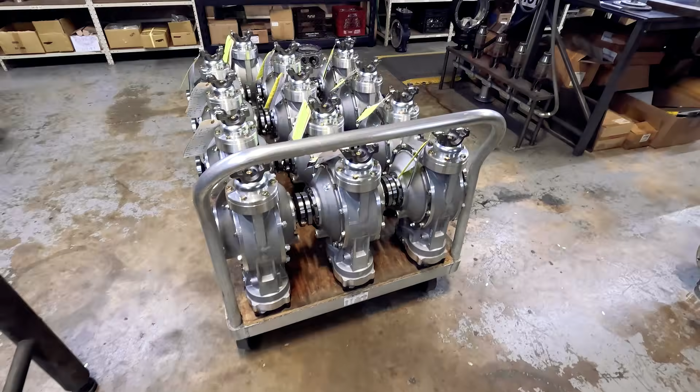For nearly 2 decades, our independent quick change diffs have dominated drift racing. Here's a detailed look at how they're built.

Our permanent mold A356 T6 aluminum center sections are cast in the U.S.A. and machined in-house here at Winters. We'll drop a link to a video explaining why permanent mold castings are inherently stronger than sand castings.

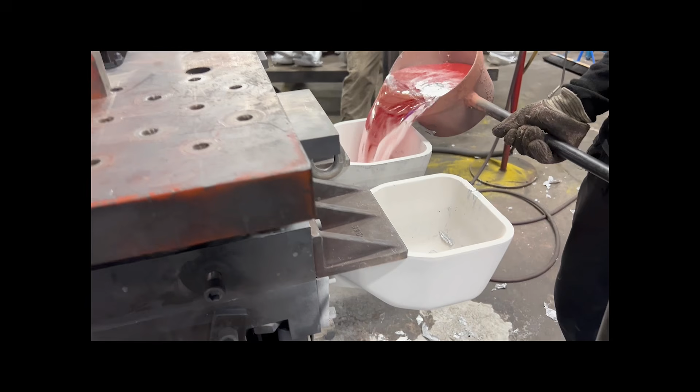This diff features our black thermal dispersant coating. The yoke bearing has already been installed and the center's been warming on our bore heater for 30 minutes to bring it to 450 degrees. If you're rebuilding a diff in your shop, you can also heat it in an oven.

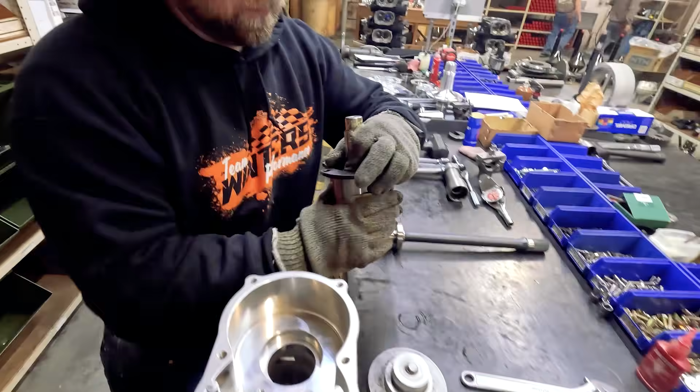At 450 degrees, the pinion assembly drops right in place. This assembly includes the bearings, bearing cup, posi nut, and washer. 3/8 16 pins help with alignment during installation.

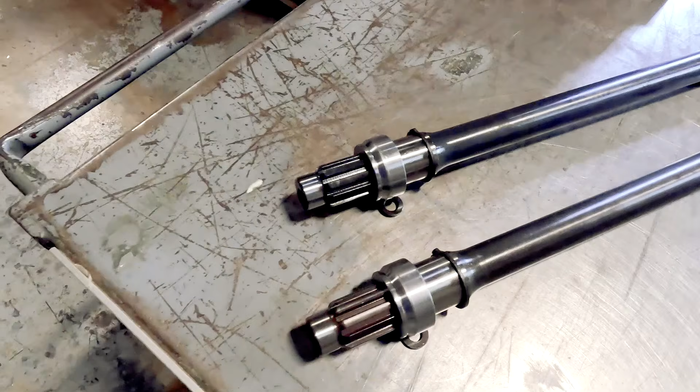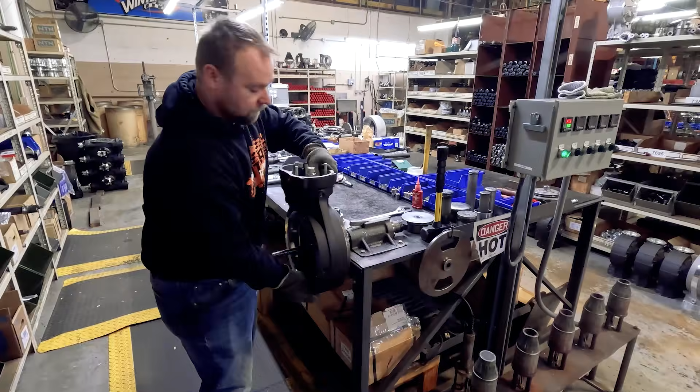Next, the lower shaft is fitted with its bearing and spacer and slid into place. Our lower shafts are made from either heat-treated steel or 350M, which has greater yield, tensile, and shear strength than the 300M shafts available from other manufacturers, due in part to the increased cobalt and titanium content of the 350M alloy. While the center cools, we'll show you how the output flanges are built.

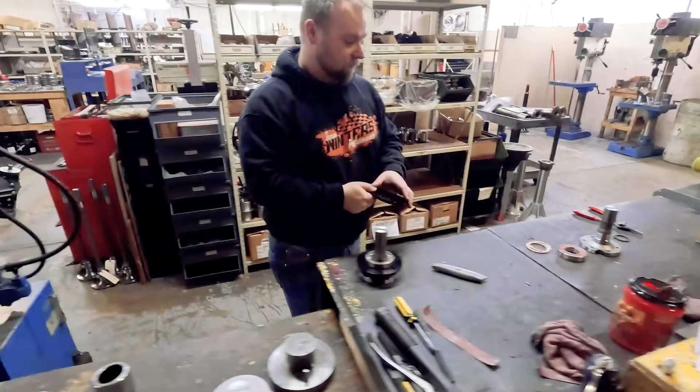Assembly begins by pressing the seal into the seal plate. Then we remove the bearing seals, oil the seal in the seal plate, and slide the plate and bearing over the flange before pressing them in place.

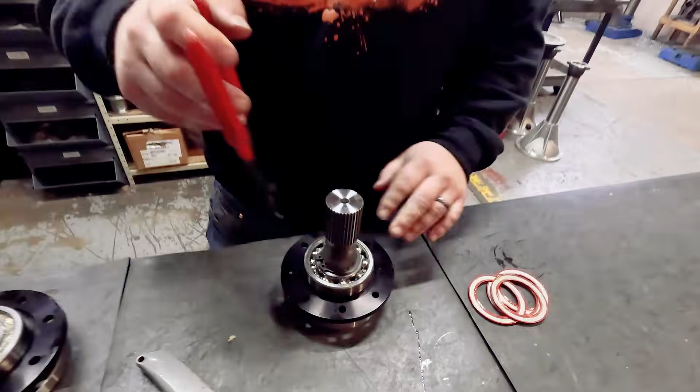Our 930 and 934 flanges start with 4340 steel forgings that are machined here at Winters. Both come in standard 35 spline, and 930s are also available in 31 spline for lower horsepower applications. After installing the snap ring, the flange is ready to roll.

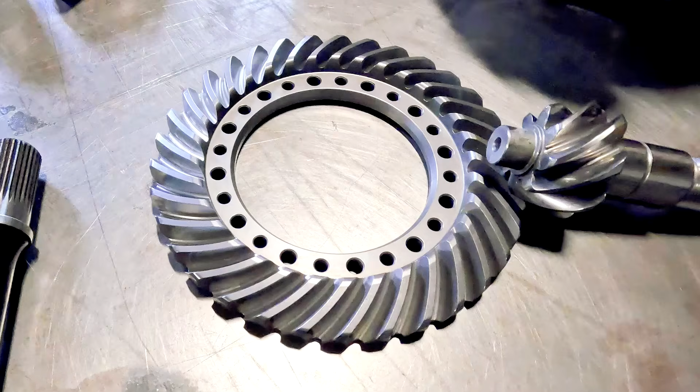2 more components only available from Winters are our heavy-duty spools and ground 9310 ring and pinions. The spools start as a 7075 aluminum forging that's machined and fitted with a splined steel insert secured by a pair of snap rings. That, coupled with the only available ground 9310 ring and pinion, makes for the strongest and most durable rotating assembly on the market.

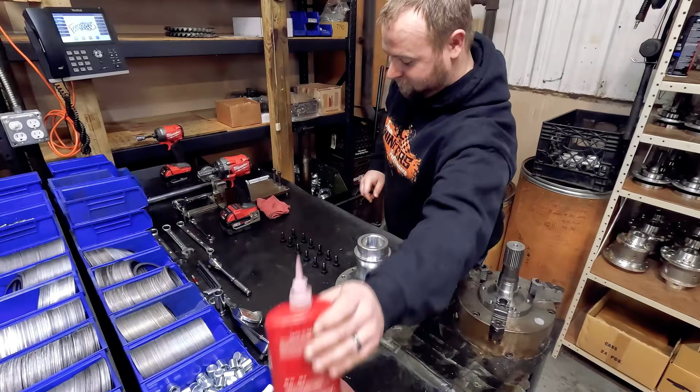The ring gear is secured with ARP bolts and flat washers with a bead of red Loctite, roughly the thickness of the ring gear mounting flange. After snugging each bolt, they're torqued to 60 foot-pounds, tightening in a crisscross pattern and then going back to double check each one.

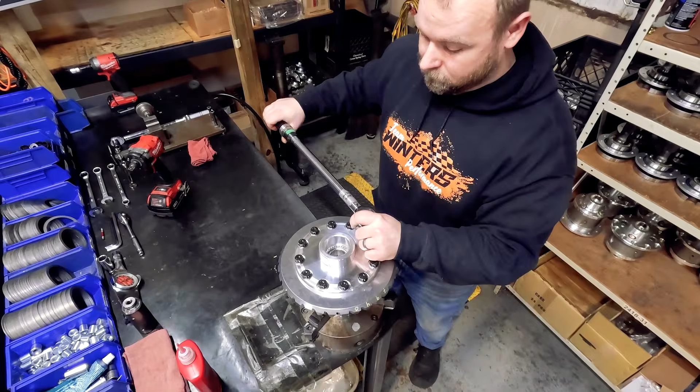Next, we install O-rings in the output flange seal plate grooves and apply a bead of petroleum jelly to prepare them for installation in the side bells.

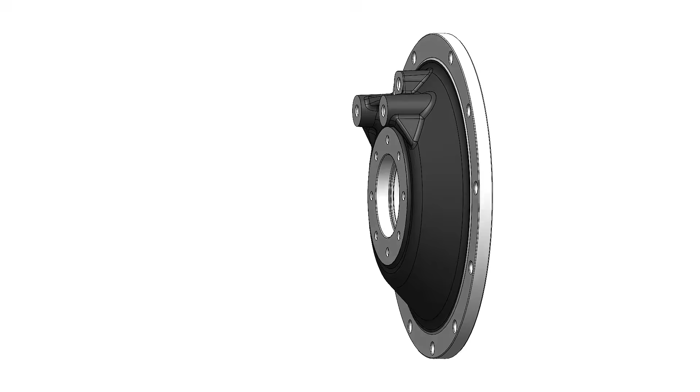An important feature of our side bells is that they're made from near-net shape 2014 T6 aluminum forgings. Near-net shape means that the raw forging is as close to the shape of the finished part as possible, and that only the critical mounting surfaces need to be machined.

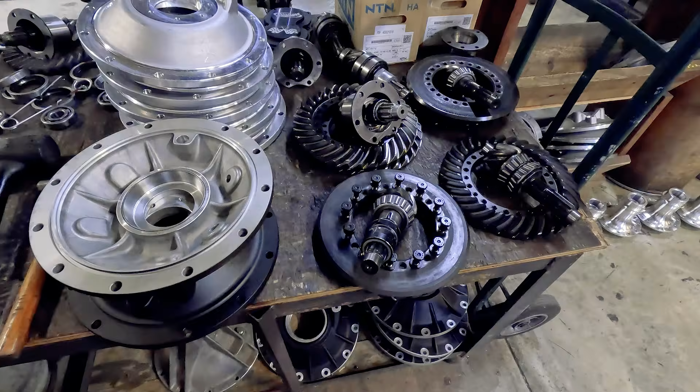When you machine an entire forging to create the shape of the part as other manufacturers do, you cut into the grain structure of the forging and expose the grain ends, which can lead to cracking and fatigue. We're the only ones who've taken the extra step to create near-net shape forgings, and in doing so we capitalize on the strength of the raw forging to create a stronger bell.

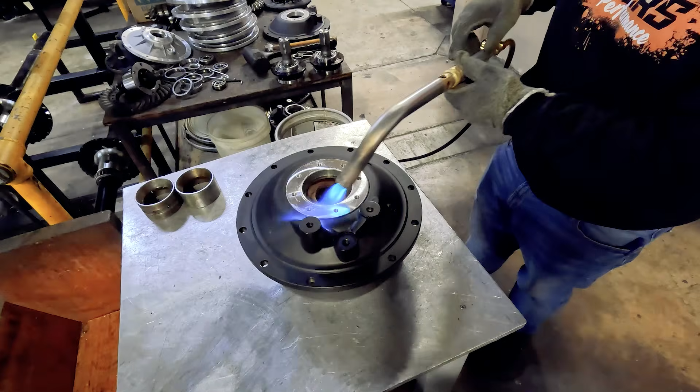To install the output flanges, we torch the bell for about 40 to 60 seconds using a propane torch with a rosebud tip. This can also be done with an oxyacetylene torch, but be careful not to overheat the bell since oxyacetylene burns much hotter than propane. Once the bell is warmed up, the flange drops in place.

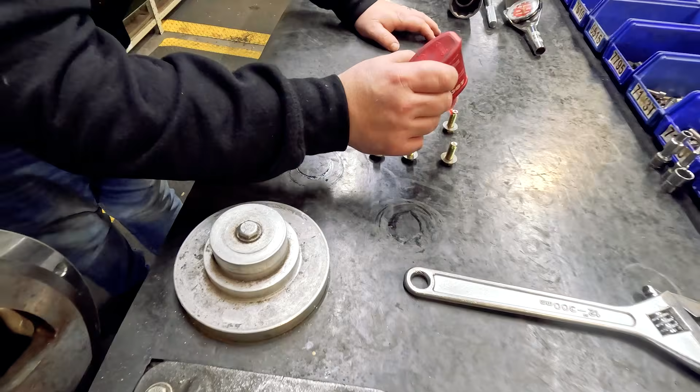When the center section returns to room temperature, we remove the pinion alignment pins and install the bearing retainer. Each 1-inch long 3/8 16 grade 8 bolt gets a bead of red Loctite before being run in and torqued to 25 foot-pounds.

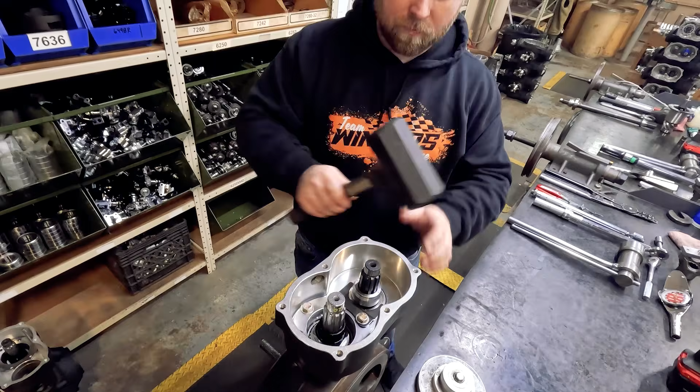Then we loosen the posi nut with a special 1 7/8 socket wrench and hit it with a dead blow hammer to make sure the nose bearing is seated properly. You'll know it's seated when there is a little bit of play in the pinion after you've hit it with the dead blow. Next, we use the same wrench to snug the posi nut while rotating the pinion.

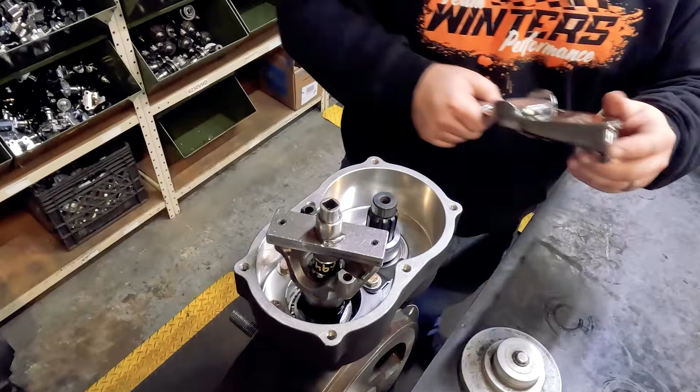Then tighten it to 15 inch-pounds of rotating torque. Petroleum jelly is applied to the posi cap before it's slid over the pinion and snapped into place.

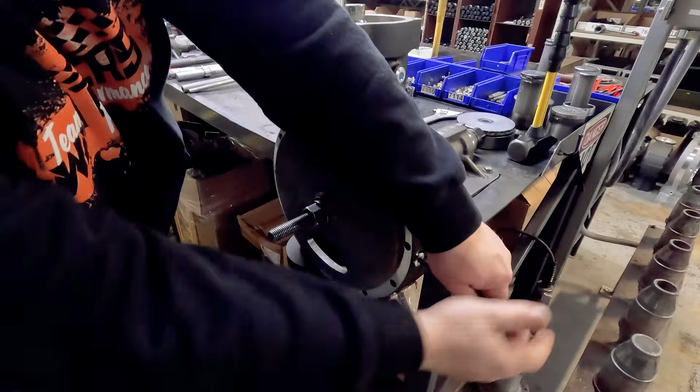Then we install the various plugs, including the drain plug, 2 vent plugs, and the fill plug at the quick change gear cavity. Next, we head over to an assembly bench and install a fixture for our assembly jig.

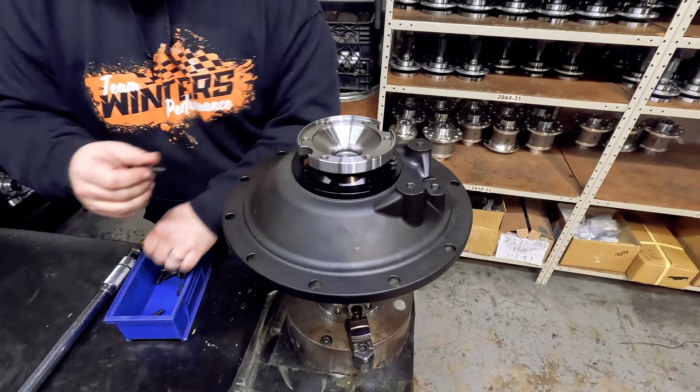By now the bells have cooled and the output flanges can be bolted in place. As we did with the ring gear bolts, the seal plate bolts are snugged and torqued in a crisscross pattern before going back to double check each one. The torque spec for these bolts is 17 foot-pounds.

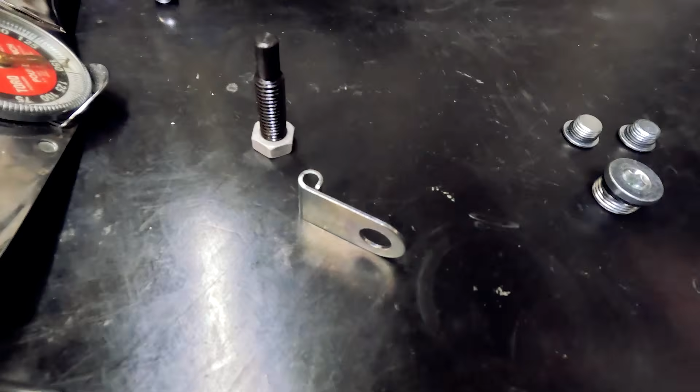In the left bell, we install the breather tube clip and an adjuster screw, which controls the amount of deflection of the ring gear. For now, it's just screwed in a couple of threads, but it will be set once the diff is completely assembled. Next, we temporarily install a breather plug, which is a -6AN O-ring fitting located adjacent to the brake mounting boss.

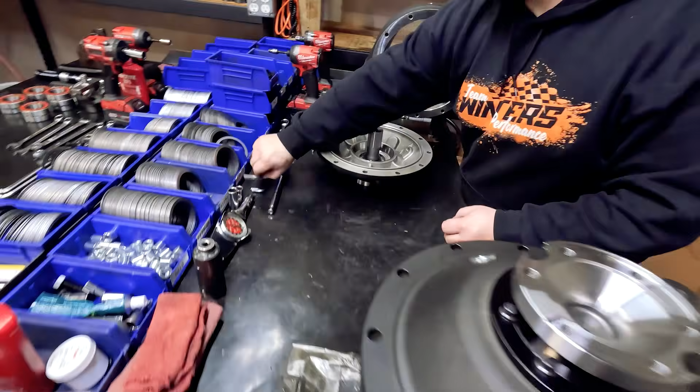Last is the oil fill plug at the top of the left side bell. Then on the right bell, we install an oil level plug located just below the axle line. O-rings are installed on both bells. On the left bell, we apply petroleum jelly to the bore where the adjuster screw is threaded in before installing the thrust block from the inside out.

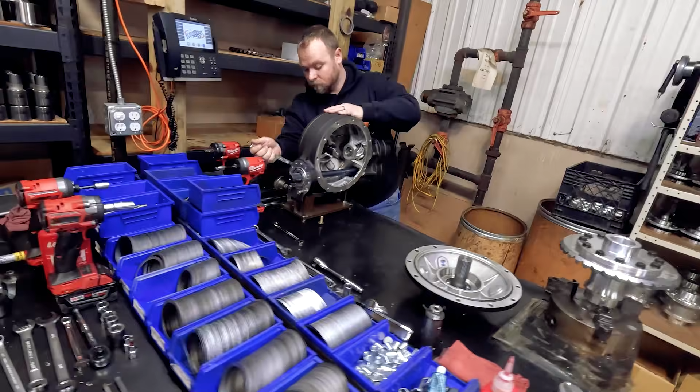The right bell is installed first, beginning with a 1 1/4 inch long 7/16 14 grade 8 bolt and flat washer installed at the 4 o'clock position and snugged in place. Then the 5 1/2 inch 7/16 20 thru-bolts and flat washers are installed.

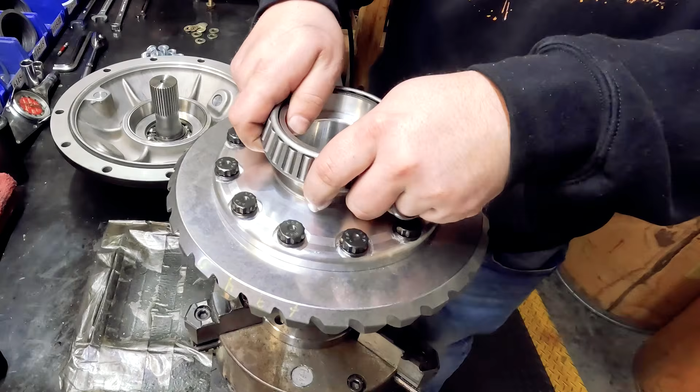To begin the spool installation, we install a series of shims before the tapered roller bearings are slip fit in place. On the left side, we start by shimming to 70 thousandths using 3 shims measuring 45, 15, and 10 thousandths thickness. On the right, we begin at 74 thousandths using 4 shims, 1 40, 2 12s, and 1 10 thousandths shim.

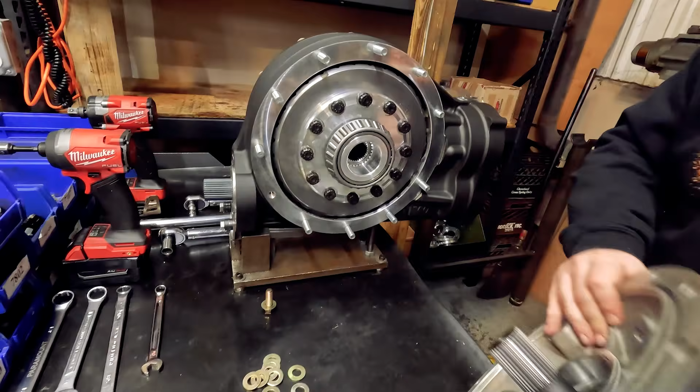The spool is then slid into the center section over the right output flange before the left bell and flange assembly is installed.

Once again, a 1 1/4 inch grade 8 bolt is installed first, but on this left bell it goes in the 8 o'clock position. Then we install a flat washer and lock nut on the thru-bolt at the 4 o'clock position and torque it to 35 foot-pounds.

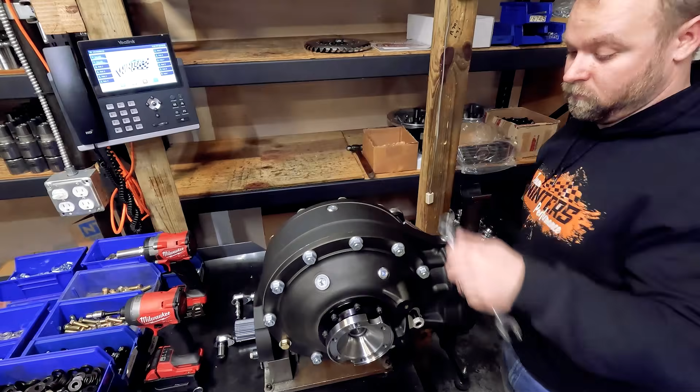The gap between the bell and center section should be 12 to 15 thousandths. If it's outside of that spec, shims will need to be added or removed to the left side of the spool in increments of as close to 5 thousandths as possible. Once the gap is correct, we install the remaining flat washers and lock nuts and torque them to 35 foot-pounds.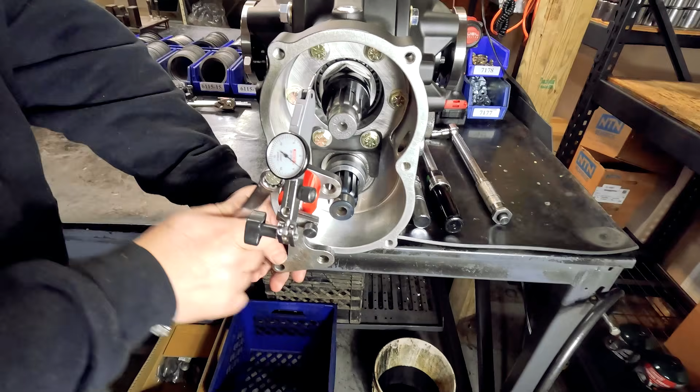Next, we check pinion preload and backlash. We start by rotating the pinion 3 to 4 times to seat the bearings, then check that the preload measures 25 to 30 inch-pounds of rotating torque. Then we attach a gauge to check backlash, setting the needle on the flat root of the pinion spline.

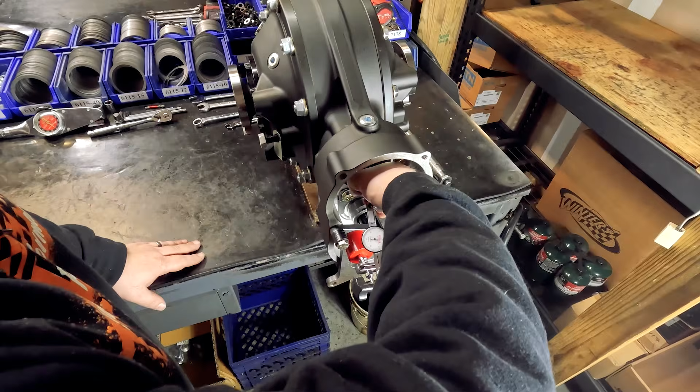Rocking the pinion should yield no more than 4 to 6 thousandths of play. If it's greater than 6 thousandths, we need to remove shims from the right of the spool and add them to the left in small increments, as close to 5 thousandths as possible. If backlash is less than 4 thousandths, we remove shims from the left and add them to the right in the same increments. Next, we apply red Loctite in the gear cover stud bores before running in the 3/8 studs.

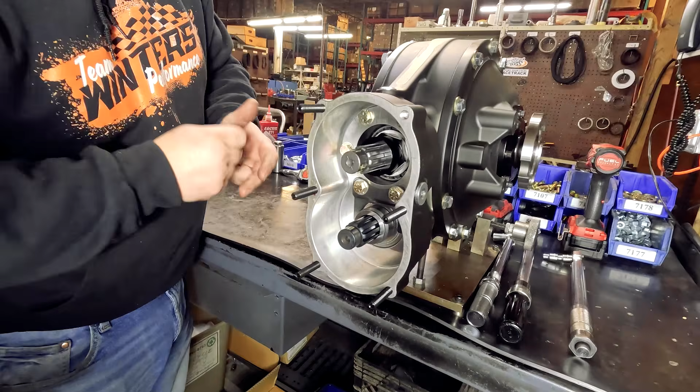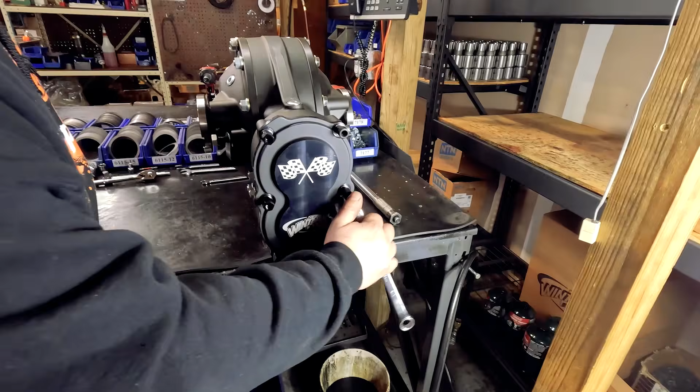Then we install the gear cover O-ring, slide the gear cover on, and secure it with anodized aluminum high nuts. Now that the assembly is almost complete, we can set the adjuster screw. Red Loctite is applied to the threads, then the screw is run in until the thrust block touches the ring gear. Then it's backed off a 1/4 of a turn and locked down.

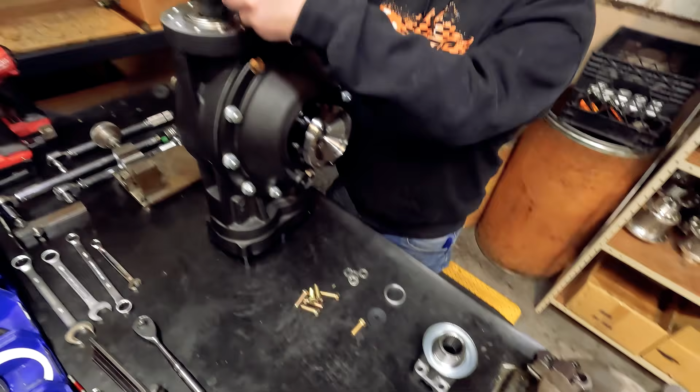Next, we remove the 2 short grade 8 bolts from each bell and apply a bead of silicone to the threads, which will seal the bores once they're reinstalled and tightened. The last components are the front seal plate and yoke. After installing the O-ring on the seal plate, it's placed on the center and fastened with 1 1/4 inch long 3/8 16 bolts torqued to 25 foot-pounds.

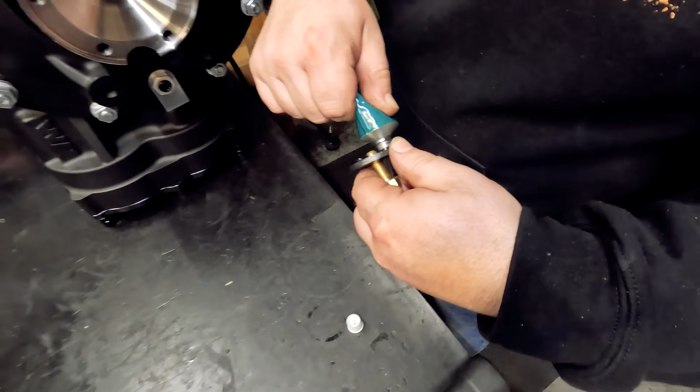Then we lubricate the seal, install the yoke spacer and 1350 series yoke, and tap it with a dead blow hammer to make sure it's seated. A bead of silicone is applied to the flat washer before it and the yoke bolt are installed and tightened to 45 foot-pounds. Once assembly is complete, we pressure check each rear, filling the cavity with 20 psi of air pressure for 10 minutes.

After confirming it's leak-free, we remove the breather plug and install a -6AN breather fitting, which now comes with a larger 1/4 inch OD breather tube.

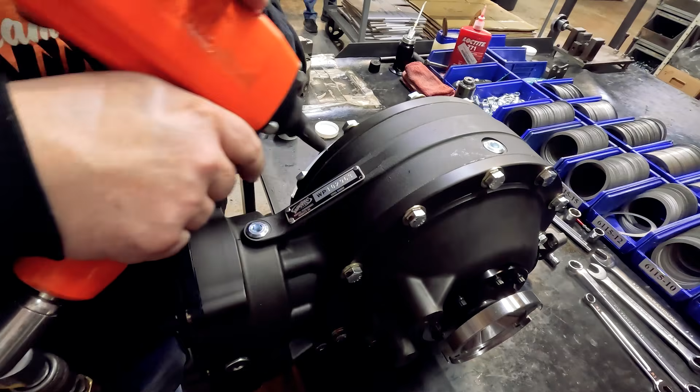Last comes the Winters serial plate, which allows us to track how each diff is equipped when it leaves the shop. These diffs are the strongest on the market and are used in some of the most powerful, torque-heavy drift cars on the professional circuit.

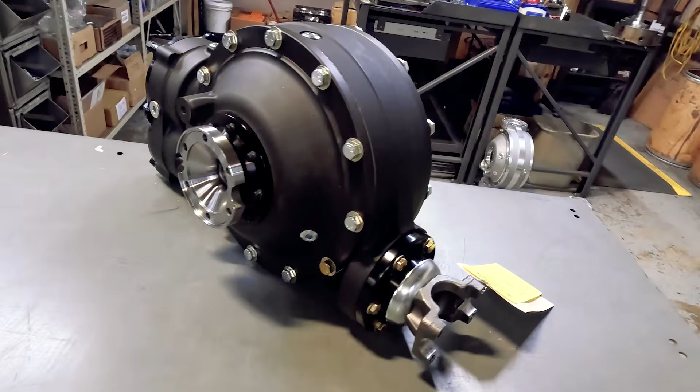With the exception of a select few parts, like NTN and Timken bearings, every Winters component and complete diff is machined, built, and assembled in our plant in York, Pennsylvania.